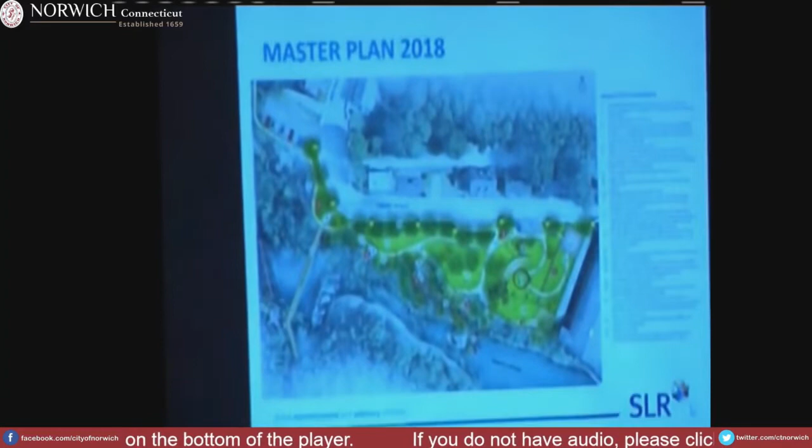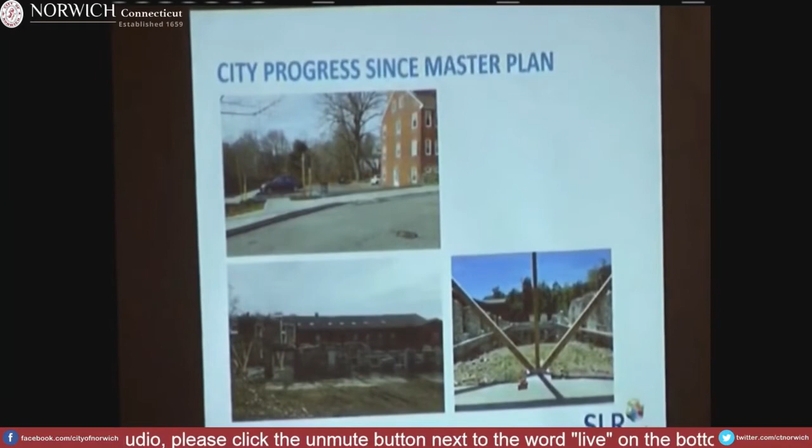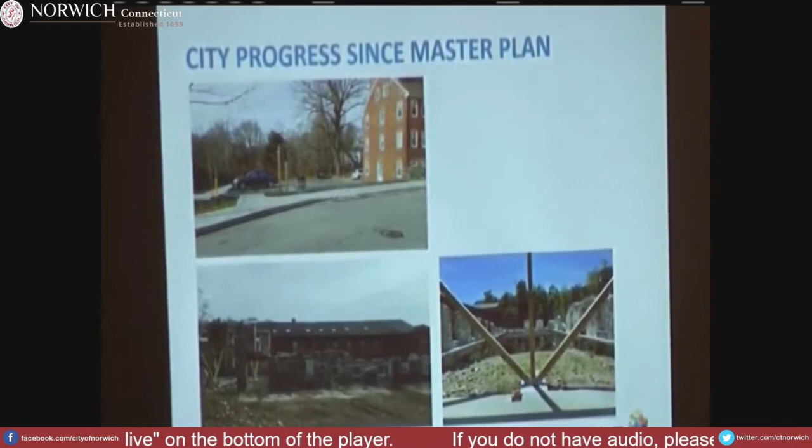I want to give recognition to some of the great work already done based on the master plan. The city acquired the property where a former residential building was removed, a small parking lot was installed to give access to the site, and there was major partial demolition of the granite mill building, which is now the remnant stone mill with support structure within it. Really some major changes have occurred on site, so if you haven't been there recently, it's certainly worth taking a drive or walk by.

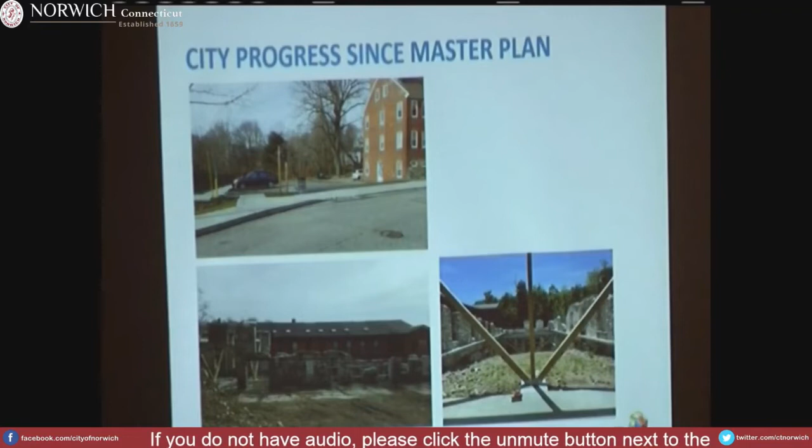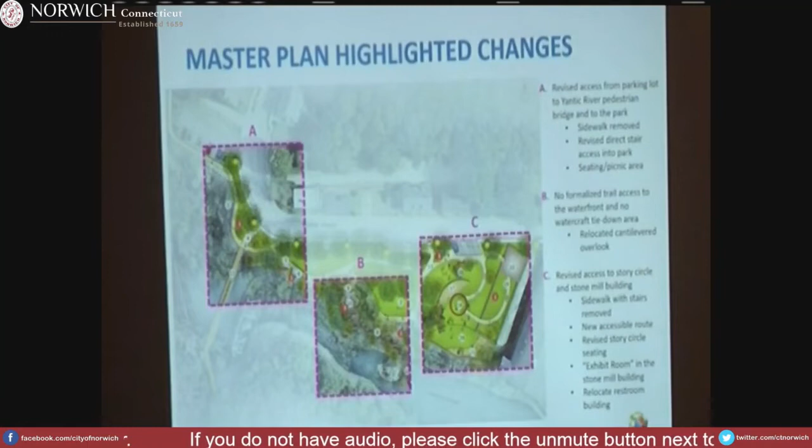These are some of the reasons we went back and did additional survey, reaching into the existing conditions out there on site. Tonight we wanted to highlight what's changed from the master plan. Nothing has really evolved as a tremendous diversion from the previous plan, but we wanted to touch on three main areas so you understand the thought processes going through this, and how the plan is evolving to coalesce into the construction documents. With that, I'll turn it over to Lon, who will walk you through these three separate areas within the site.

I'm going to talk about the major changes to the master plan. In area A, we originally had an accessible path go through the lawn to the pedestrian bridge, but the new parking lot has changed the grade, so we'll have a new configuration in this area, as well as direct access from the parking lot to the park.

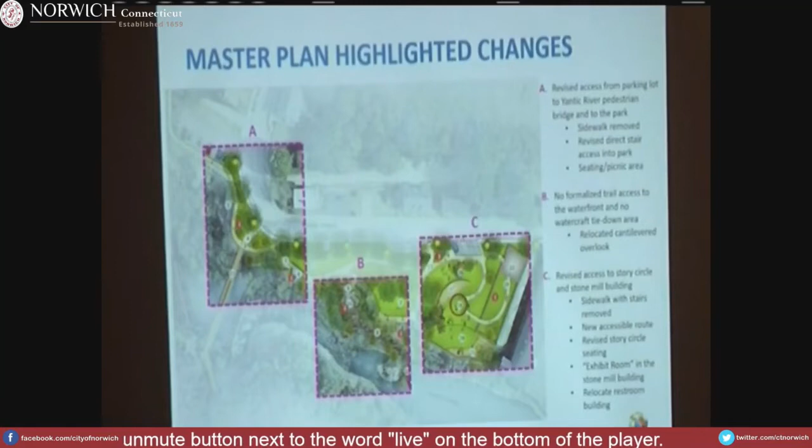In area B, we've removed all the trail access and the kayak landing, and we'll have a new location for the cantilevered overlook. In area C, you can see an accessible route going from the parking through the building and back to the story circle. The new survey has changed the topography, so I'll talk about the new layout in this area.

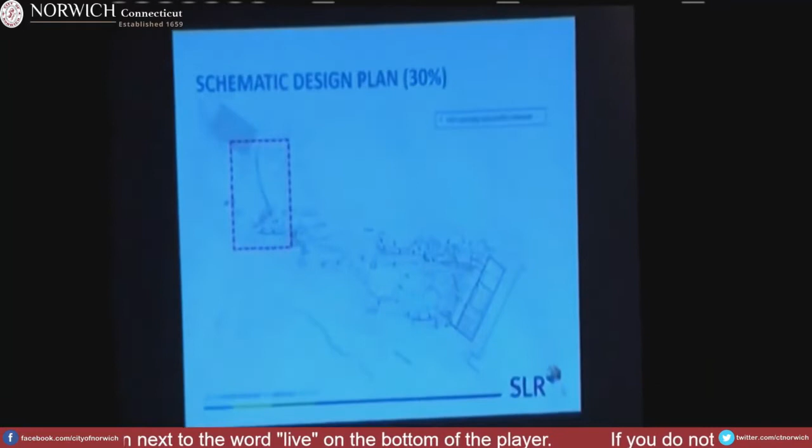So here is the schematic design. Originally we had a path go through, but the grading in the parking lot requires a really long run from the parking to the bridge.

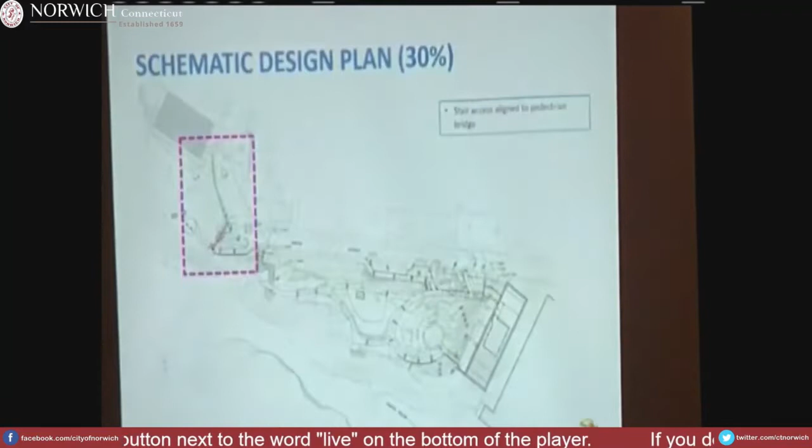So we checked the existing sidewalk and found it's in pretty good condition. As you can see from the image, the slope is about 5%, and in the new schematic design we plan to use the existing sidewalk to connect the parking lot to the park. We kept the stair access to the pedestrian bridge the same as shown in the master plan.

This is an existing image showing the fork shape, and the proposed stair will be aligned to the pedestrian bridge.

At the junction in this area, our path connects to Yantic Street, and we also found that this lawn area has a potential vista view to see the upper fall and the train track, so we proposed a picnic area.

This image shows the view, and the existing lawn has a pretty flat slope, so it's an ideal location for a picnic area and benches.

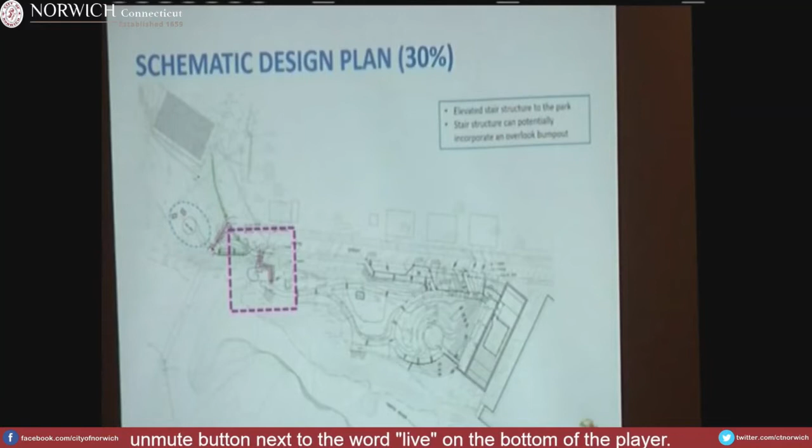Originally we had stair access going over the gorge to the park. We found it's structurally challenging to do the elevated staircase from the old location, so we proposed a new access point for the elevated staircase.

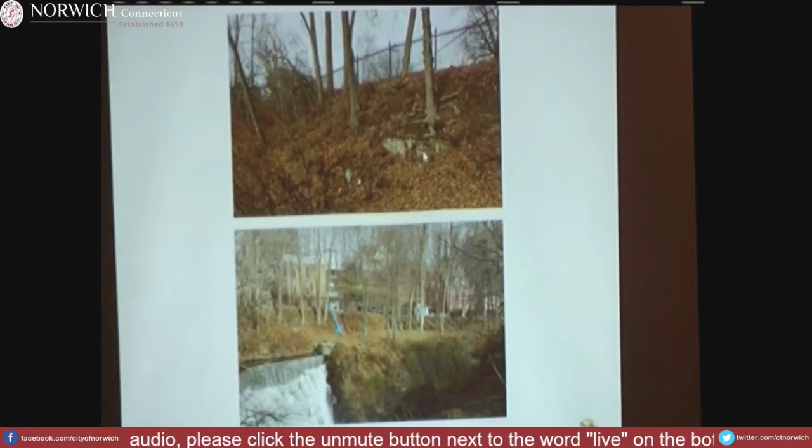This image shows the approximate location of the new access, and the upper image shows the existing condition of the topography, which is more promising for putting in an elevated stair access.

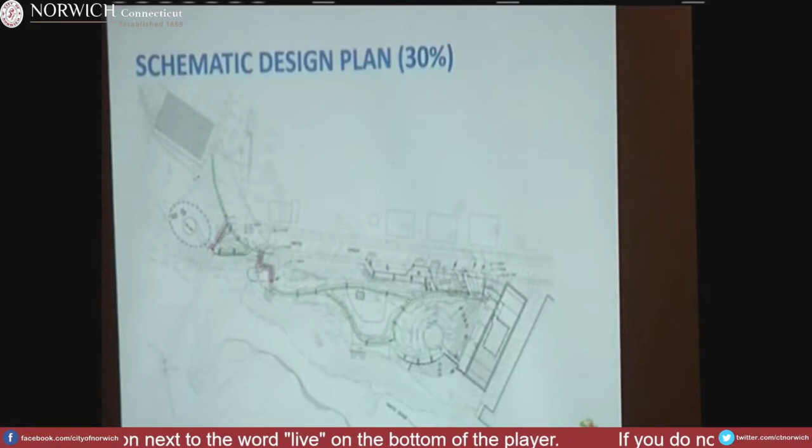Then we moved to the park. The pathway through the park we kept the same as the master plan. The only tweak is we moved the location of the overlook decks.

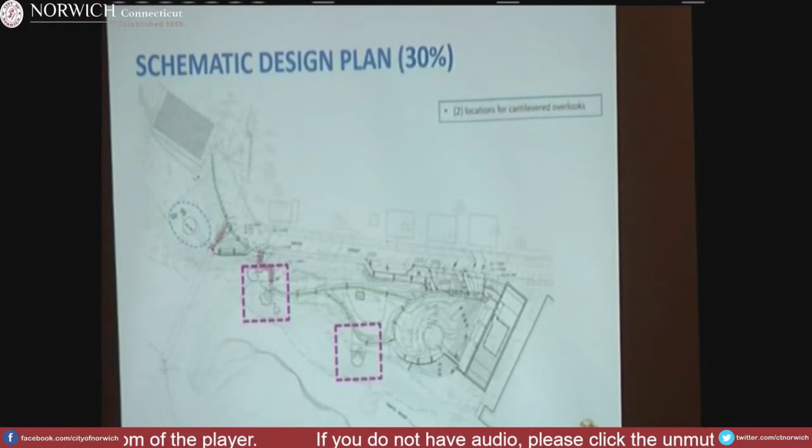One overlooks the Yantic Fall, and the other looks over the Yantic River. This image shows the view to the fall, and this is the image of the second overlook location, seeing the river. We will clear some of the shrubs to provide a better view.

Moving to the parking area, originally we had three parking spaces, two accessible and one regular. In this schematic design, we proposed two accessible and two regular parking spaces.

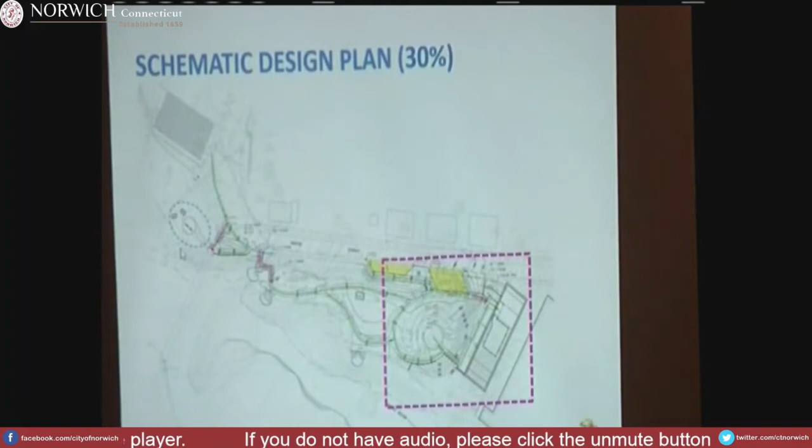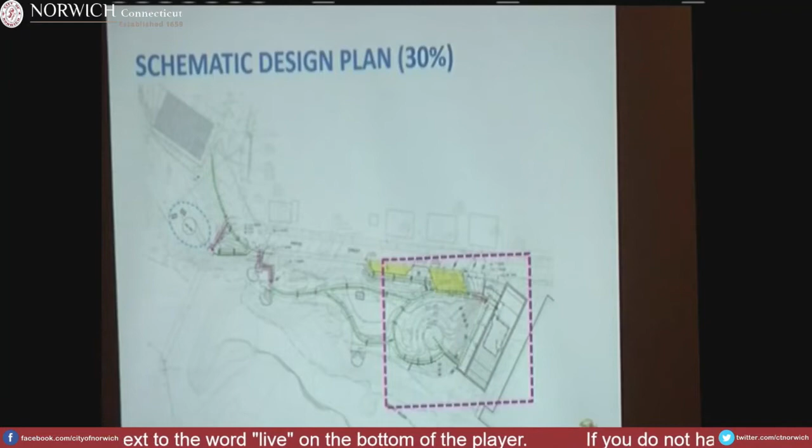Now we move to the storage circle and stone mill building. In the master plan, we have an accessible route from the parking to the stone mill. But there's a grading change, a 7-foot elevation change, so we have to put a staircase from the parking lot to the stone mill building. We still want to make the route accessible to the storage circle and stone mill building.

So we propose another loop all the way down to get to the storage circle, with an accessible ramp to connect to the existing concrete slab, making it accessible all the way to the stone mill building. Along this route, we will have exhibit panels to tell the history of the site.

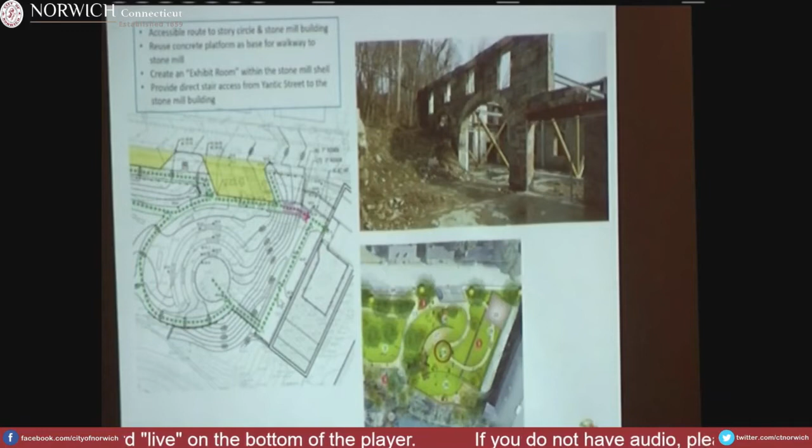We also kept the amphitheater features at the story circle. Regarding the grading of the amphitheater, if you look at the image in color here, the seating was kind of condensed and tight to each other.

As we worked through the site access and tried to consolidate some of the pedestrian routes, we felt it could work just as well if the amphitheater was more of a traditional style with rows between the seating, allowing you to access freely from the top edge and filter your way into the amphitheater itself, instead of having a dedicated walk that paralleled the stone mill building.

So we basically removed one walk and rerouted the accessible route out and around, almost to the Yantic River side, so you can access the story circle itself.

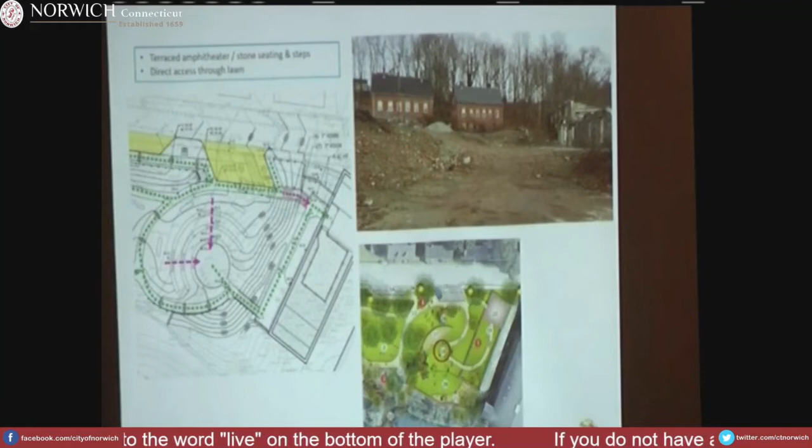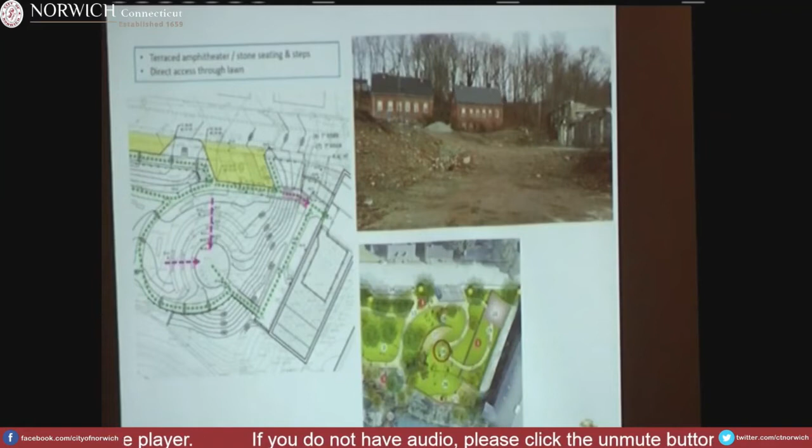You could then walk across a ramped section onto what is now a concrete pad in front of the stone mill building, and then walk parallel to the building and through the old mill race to access the actual stone mill remnant shell. You can see the photo on the right-hand side, that's Lon standing there.

That would be the entryway into the exhibit room of the stone mill. Now, we do have to contend with the structure of the mill that's currently holding up the walls.

This area, highlighted in somewhat of a red color, would be the exhibit room, which would utilize decorative fencing and interpretive panels to direct visitors through that space, but not allow them to actually access the structure itself or touch the stone walls, because they are still somewhat exposed.

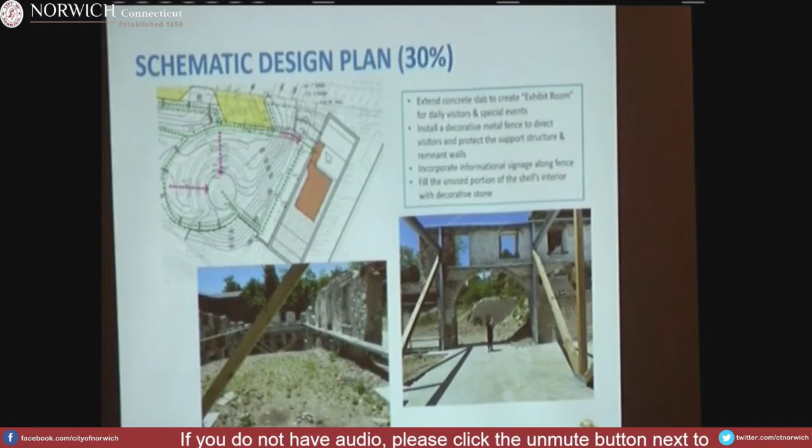You can actually pull stone out of them if you so desired. So to keep people away from that edge and away from those wood structures that could be climbed if given free access, we're trying to keep people within a dedicated area that allows them to experience the feeling of being in that building shell, while keeping them safe and keeping the building and the structure safe as well.

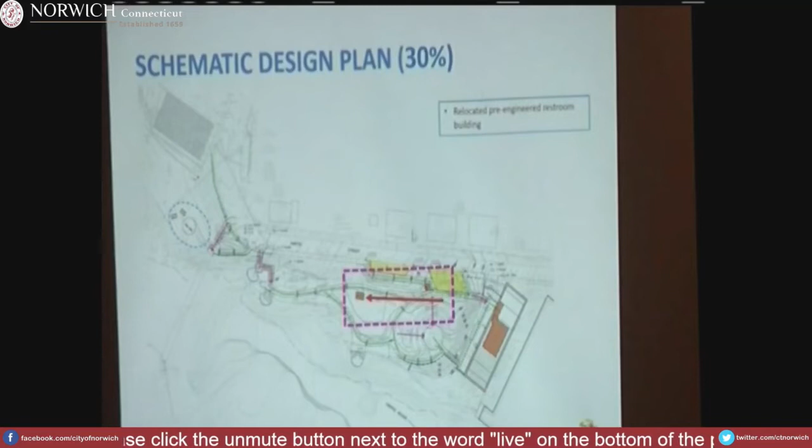Finally, the last change here is looking at the restroom building. The master plan has a small pre-engineered restroom building that was located somewhat towards the mill building. City staff brought up a good point that it was across from the view of the residential buildings.

We could probably try to get it out of their view shed, so we shifted it over. You can see the arrow pointing here, so it does not align directly across from the residential buildings. A slight shift actually brings it more central to the site, so if you're accessing it from the east or the west, you have more of a midpoint to go to.

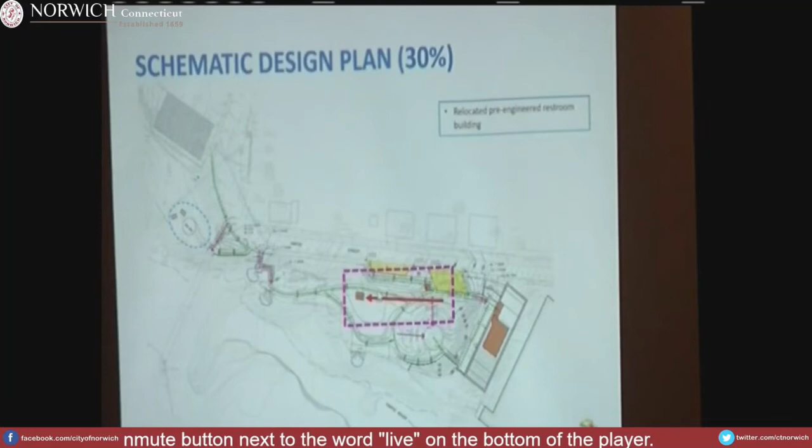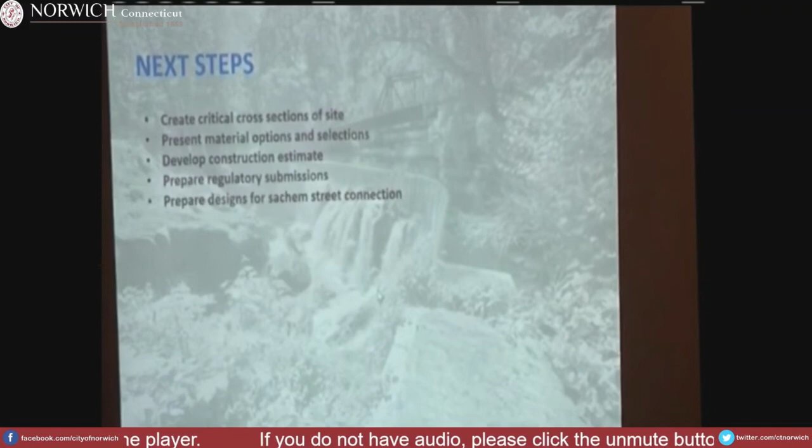As we work through these next months of the design process, we're looking to delve a little deeper into the site itself, so we'll be cutting critical cross sections to show the different elevations. There's a lot of grading to contend with, a lot of topography to deal with, so we'll cut critical cross sections to really understand the different levels you're at and how you're experiencing the site.

Another key point is we're going to be going through and presenting material options—different finishes, different colors, the style of the light fixture. There's a lot of very small details that can really make the park shine, and we want it to be durable and maintenance-free, but we also want it to be beautiful.

So we'll be presenting different options in terms of how that can be and how it becomes a total package for the site, so that it reads as one single park in the overall scheme of the City of Norwich, but really shows off the great character and the inherent characteristics of the site.

Of course, we'll also be working through construction estimates so that we're making sure we're on budget. There's a lot of different components to the project, so we're going to have to be very cognizant of that and make sure that they're working towards that budget and not preparing plans that will go beyond it.

And in the next couple months we'll also be submitting regulatory submissions, so we have to submit to the Inland Wetlands Commission as well as Planning and Zoning.

And we'll also be preparing the designs for the Sachem Street connection. So beyond the park itself, the project grew a little bit to that Sachem Street connection—we'll be redoing the pathway there and the stairway up to Sachem Street, which will provide much safer access that currently is technically closed, but I'm sure people still use it, as we've seen.